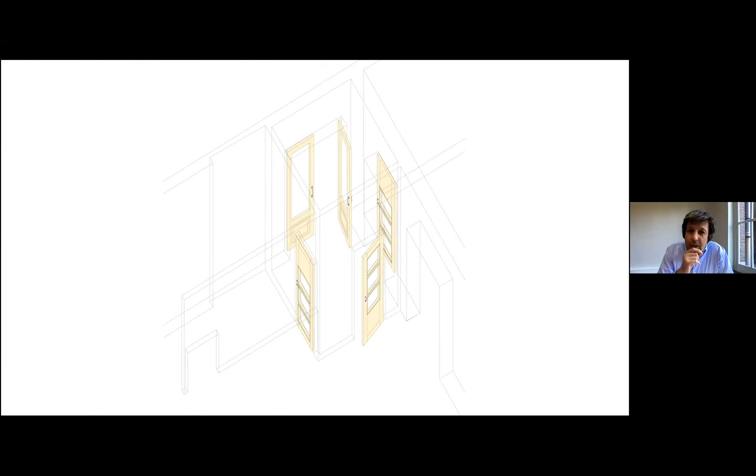Chapter 1, some thoughts. Sometimes it's also about the question of no design. Sometimes as an architect you have to start with not a real intervention, but a kind of slight change of an element. I want to bring this idea on the table, the gallery in Ghent, a kind of in-between hall. You come in through the double door and you have 3 equal doors. Of course, the owner wants that you go into one of the gallery rooms, not immediately into one of the side things.

Just turning the doors, changing the hinges, so that the normal reading of the door, where you have the look on the glass, is really the place you wanted to go through. And the closed part was at that moment on the sides. So you have what is seen as a normal way of walking through a door. And the nice thing was that the lock was exactly in the middle of the door. The carpenter made it very well, so that we only had to change the hinges.

And another intervention, because it was a gallery for objects, also used objects, used in the kitchen. There was the need to still connect the rooms but keep the function as a kitchen. So a piece of the wall was cut out to, on one hand, keep the whole room, and on the other hand, make the links. It's the idea that probably there is no need to really intervene. There is probably only the need of a change in perception.

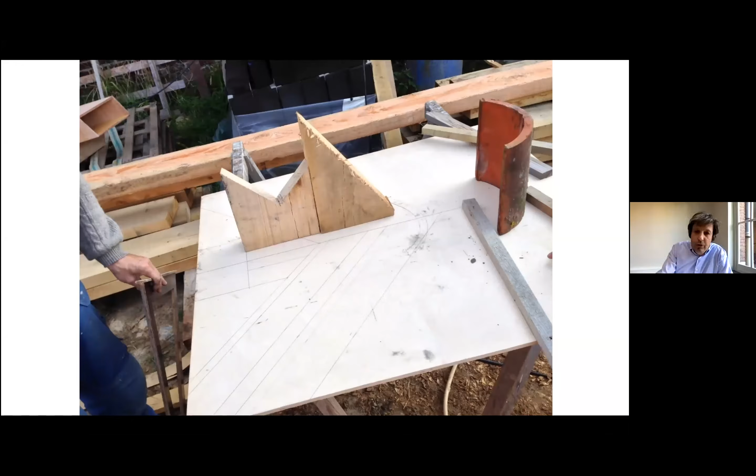The question of construction. In a project in Pepingen, the one-to-one action on the construction site shaped the way we worked on this project. And this is the result of taking this beam away, because the beam was too low to have the space functioning. So what we did is in fact make a kind of prosthesis in steel to reinforce it after the cutting, and even come to the pleasure of how you construct things, how you bring the metal into the wood, and how you connect things.

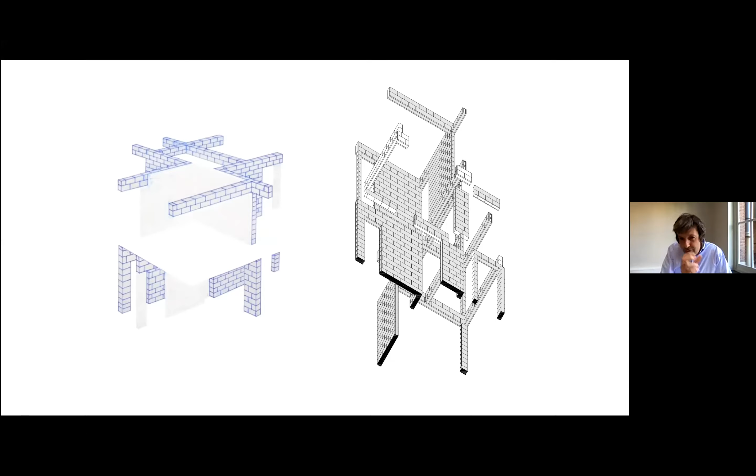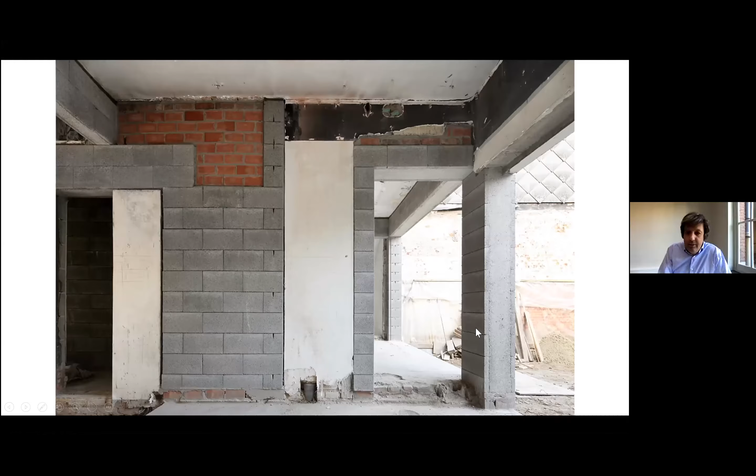The question of construction too: in the project Rampelken, we started with a building where after dismantling you felt that the construction was not stable enough. You could imagine it could go wrong at every moment. And of course as architects we wanted to make changes in this project. So we did one intervention, with a concrete block that you can fill with concrete but also stack, to do everything with it: closing walls, reinforcing walls when needed, even making a beam when necessary. To see it as one tool to intervene in all those things we wanted to reach.

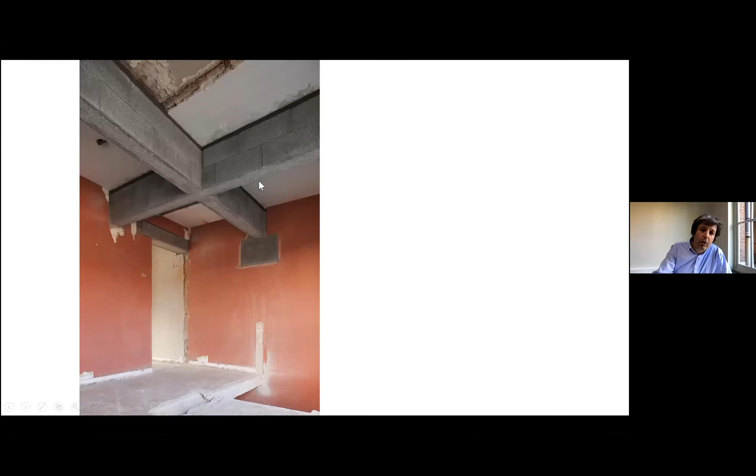Even this kind of cross where there was a wall above it, to have this as a kind of result. And the only thing we didn't plaster afterwards was the reinforcement we did. The question of material one.

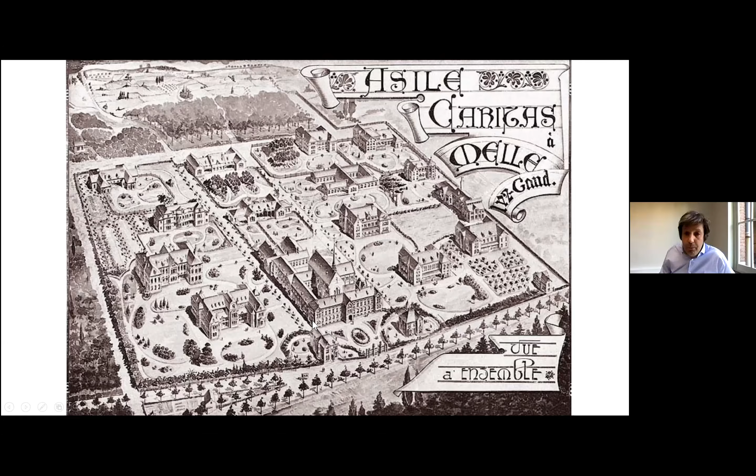After years, during that period, the treatments of psychiatric people changed, so a few buildings started to get abandoned. At a certain moment, they wanted to start demolishing this one. They took out the asbestos, and the asbestos saved the whole building.

Because the new director asked himself if they had to go on demolishing all the existing buildings, since they wanted to make a square. Gideon Boie, who was consulting the owner, brought the idea to the director to say: look, maybe instead of continuing to demolish the building, we have to raise the question of what to do with this building to different architects. So there was a mini competition.

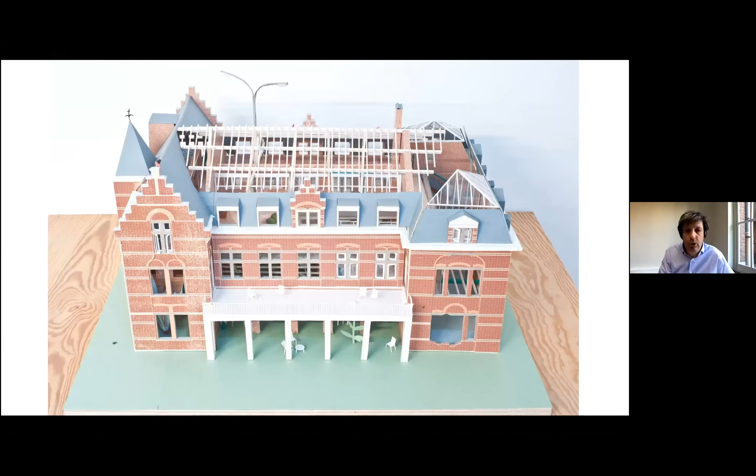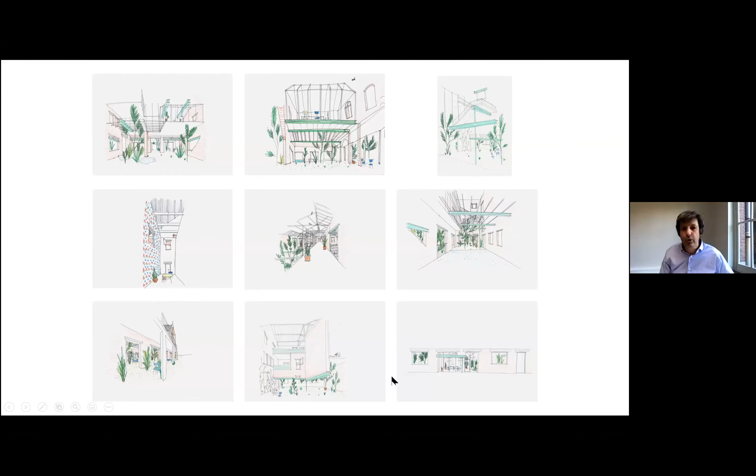We made this big model to explain possibilities in the existing building. We made those drawings to explain the different kinds of places you could find in the whole setting. To end finally with this as an end product, we made the intervention to put a few greenhouses in it. Of course, this building has a lot of limits, but also generates a lot of possibilities in use, different kinds of uses.

So the greenhouses could be used in between climate conditions. You could use this kind of theater place to do something, or some people can put a few wooden blocks to warm themselves in the evening. So it's a flexible building, in the sense it's an open public space where you can find possibilities in different ways.

Of course, we did restorations at the moment we had to restore the wall like that. And because they started to demolish it, to get a kind of machine into it, they dismantled this piece. So we restored it with new bricks.

It brought us to the Biennale in Venice, where we got the Silver Lion with this construction, this exhibition. And the idea was, of course, this existing building was not meant to stay open, so the wood was not always treated very well. So we made an exhibition with planks of thermal treated wood that can be used to replace some planks in the existing building, because the water made some damage to the wood.

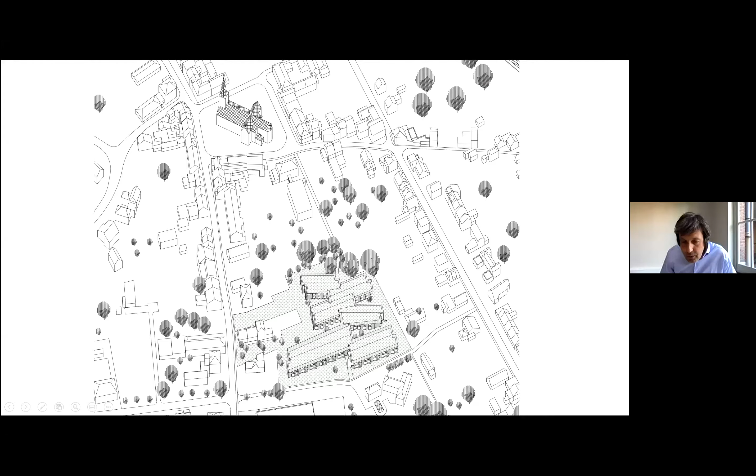It's also about living, the quality of living. We made this project Kapelleveld, elderly housing. It's in a small village. You see, it's in a hidden zone, closely related to the church, and there is a path coming through and going through the whole building to connect all the elderly housing. And on Sunday, the people who can still walk very well can go to the church.

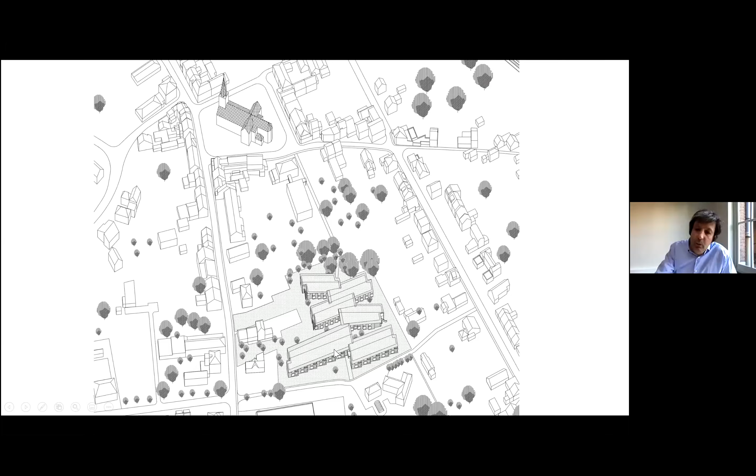To bring it in relation to its context, we started with a small scale. I won't speak about the pleasure of construction, how you can solve the dripping of water, or how you can protect a beam from absorbing moisture. But I will speak about the quality of the scale, the scale relation of the building to its context.

We brought it to a very small scale, and the corners are the result of starting from the really small scale of the room itself. That was the starting point, to come to a totality, not from a totality to the small scale. So starting from the small scale.

I just want to explain one thing, one pleasure in this project. One side of the location was a half meter higher than the other side, and look what it does with the building. The client wanted for two years to make it flat, but we spoke about it so many times, and he agreed and said, yes, okay, we deal with the half meter and we see it as a benefit.

And that made even this side more in scale with the small scale context around it. That means the outside space has a different relation with the ground around it. But as I said, it started with a simple shift in the very strict, almost millimeter-fixed square meter program.

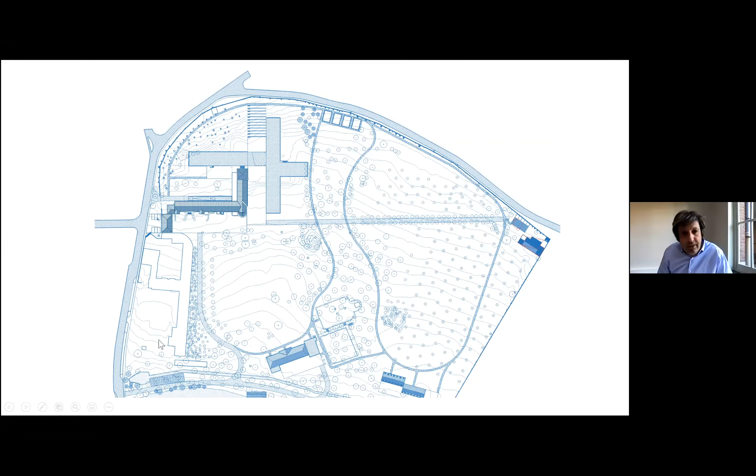One additional thing to explain - there's a really nice back wall on that side, so it's nice to have a kind of relation with that. You look here, in between the trees, you can see the wall over there. So they found a nice place in this corner.

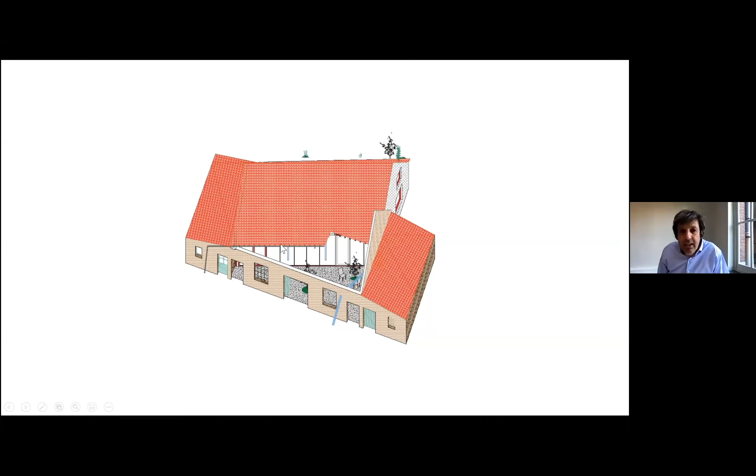They found a nice setting, a little bit hidden, and by the intervention of just flipping the roof construction, we made a kind of public, but not public anymore, because the public is over here, a private zone where you can still open the door to have an openness and relation, to catch the light and make a private zone. This is what the roof did.

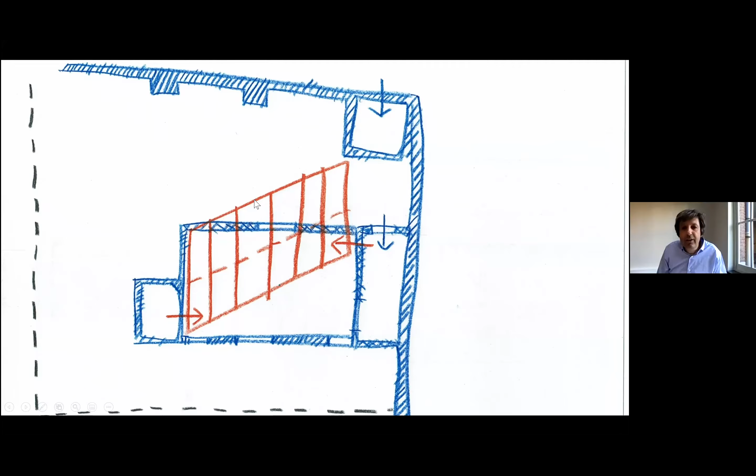The walls stay all in their place. There starts to be an outside space here. And look what's happening here: south is over there, the evening sun is coming over here. And you even can jump out of your walls in this zone because you are, let's say, fenced or hidden, still founding a kind of enclosure by the existing walls over there, using this space as an evening space, a space to sit outside your building, to be connected and related with the existing wall.

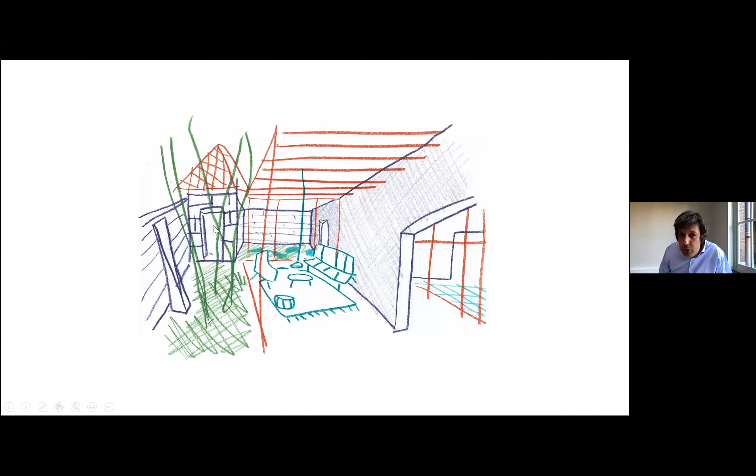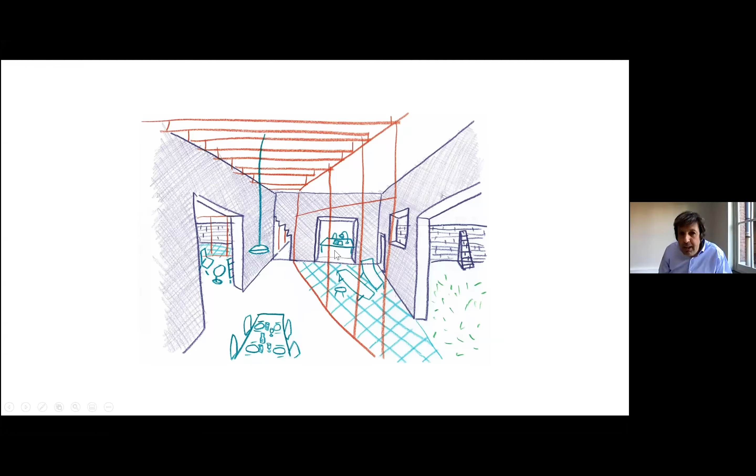There is a really small pavilion on the corner of the old walls which makes it possible that people can come from over there, entering the building as a beside connection along the walk through the whole park. And that's the other side, the sitting space there. But this is then the active zone with cooking, eating, related with the outside space, and a small cabinet, a kind of office space, also related with the outside space. And here you have the overview to the public park.

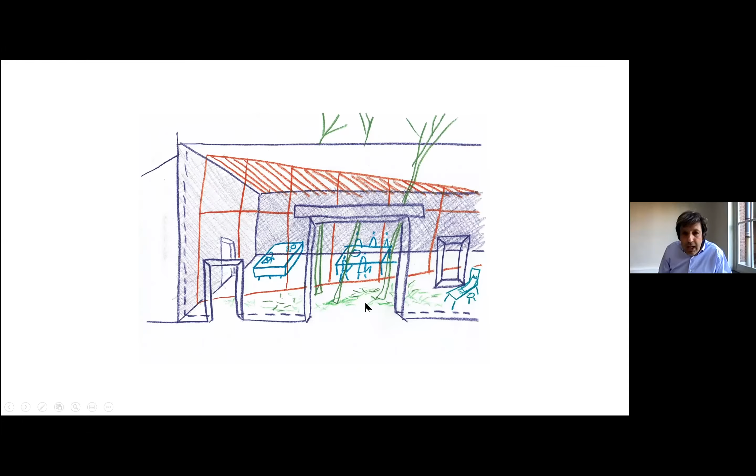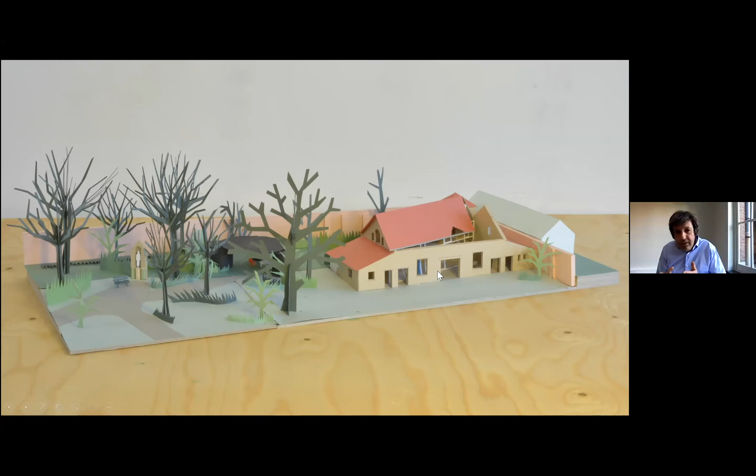From outside, you can negotiate how much you open the relation. A model of it. Here is the turning point of the walk, the Maria sculpture in the corner to emphasize the turning point. But it's all about this kind of simple shift of the roof which makes a complete other building.

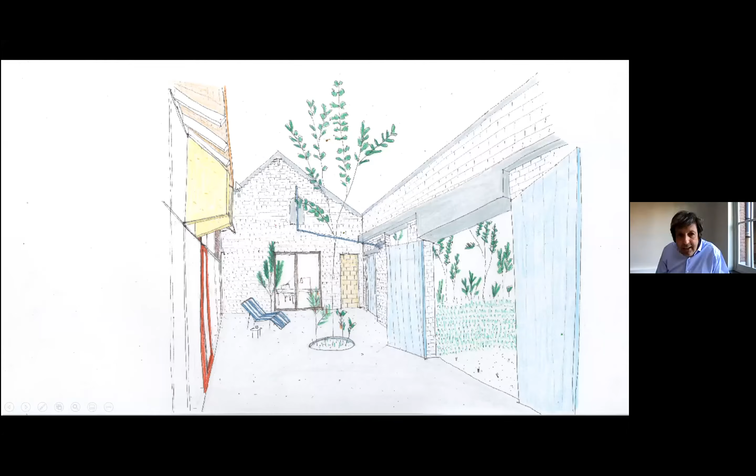The in-between space in the later phase with more worked out details, how we made reinforcements in concrete, how we stiffen the angle by a metal connection, and how the roof cantilevers to give also a kind of protection for the sun, for the upper levels for sleeping.

The sitting place related with the wall, the stair to go up, the office space related with the outside, and how people or the kids can sleep on top of it, overlooking the wall.

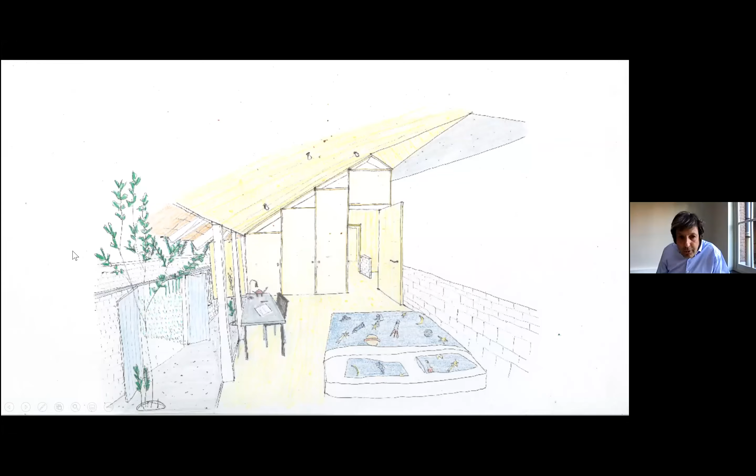And these are pictures from the moment, pictures where we are currently working on it and reinforcing the walls by doing specific interventions where needed.

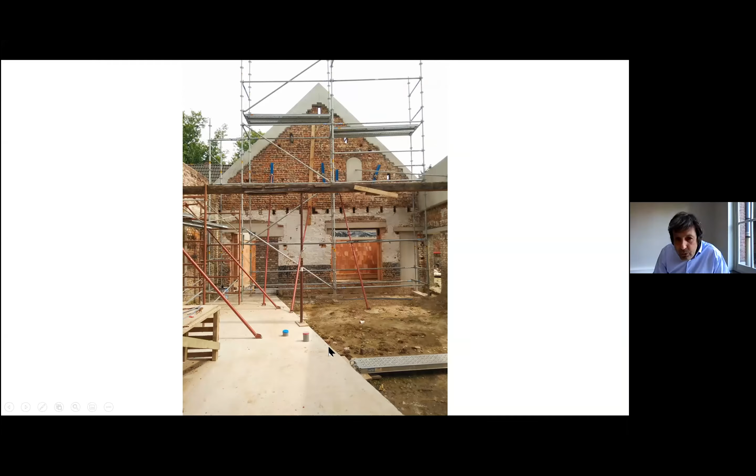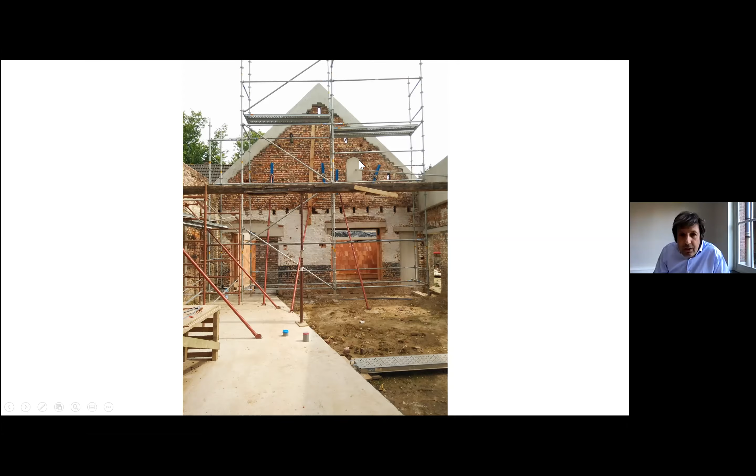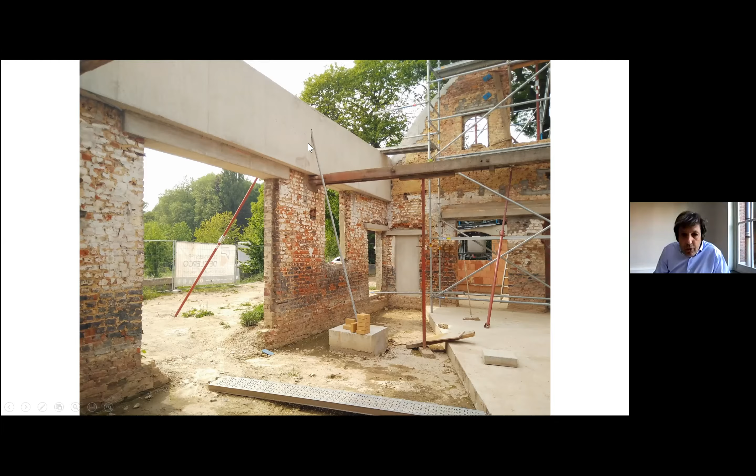Creating the in-between zone, and here you feel immediately the open space, the office was related with that, and the way we reinforce that, the connection to reinforce the corner. Looking to the other side, the relation to the openness, the kitchen will come here later, how we reinforced this view from the office space to the outside, and from the outside related with the park.

We have this one where you here just see a kind of lintel above the old wall. And we do small intervention test study drawings to use a new brick to make very specific interventions.

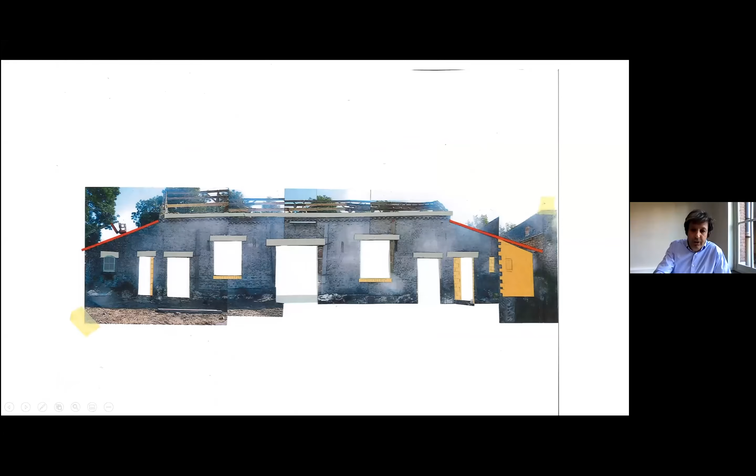Understanding sustainability in another sense. People bought this building, were in love with the way it looked like. Later on, a pitched roof was made on the building. We saw fantastic old pictures of the moment it was built without a pitched roof.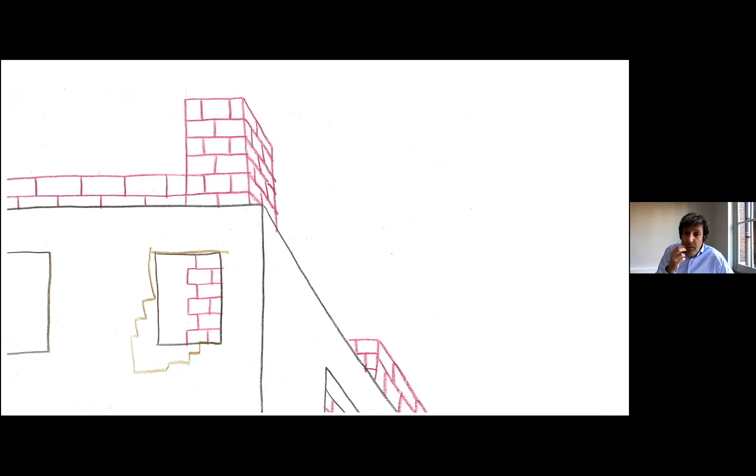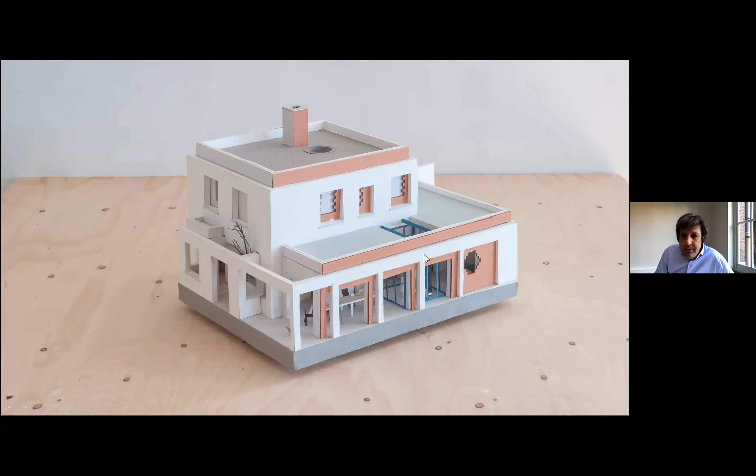This was the intervention: instead of adding a layer on the outside, we built a new building into it, a new layer inside. And this is how it looks at the moment, after doing the intervention of the new building in it, to create new spaces inside and to change the interventions, what we wanted to do with the new facade, but the facade from the inner space.

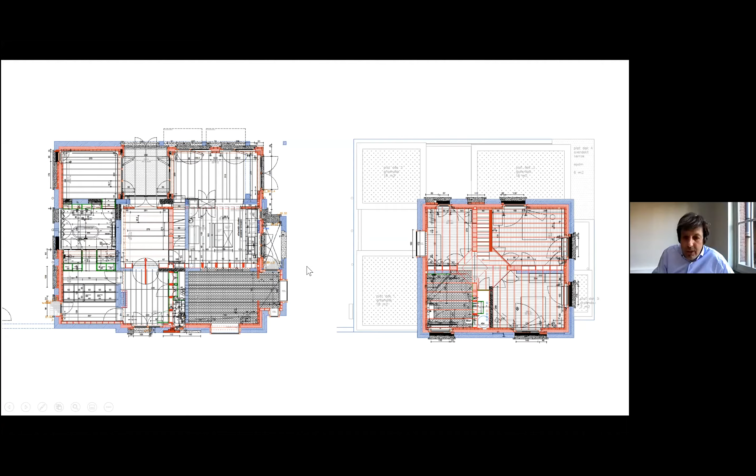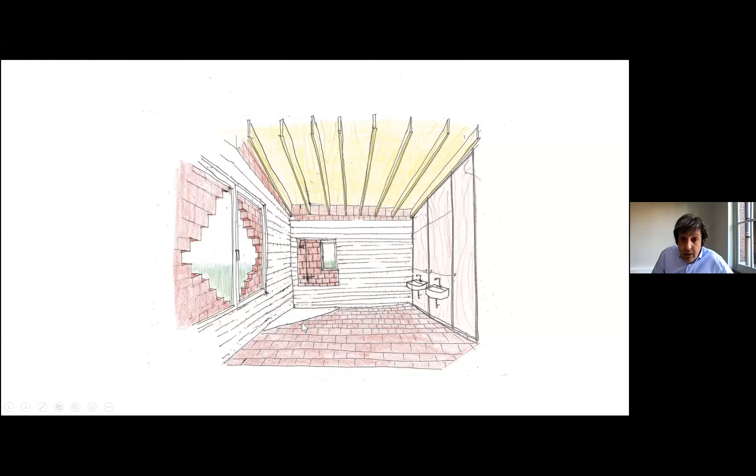A sitting space in the front, you have the entrance zone. In the back, you have a small greenhouse. First floor again, how the bathroom makes the relation with the existing.

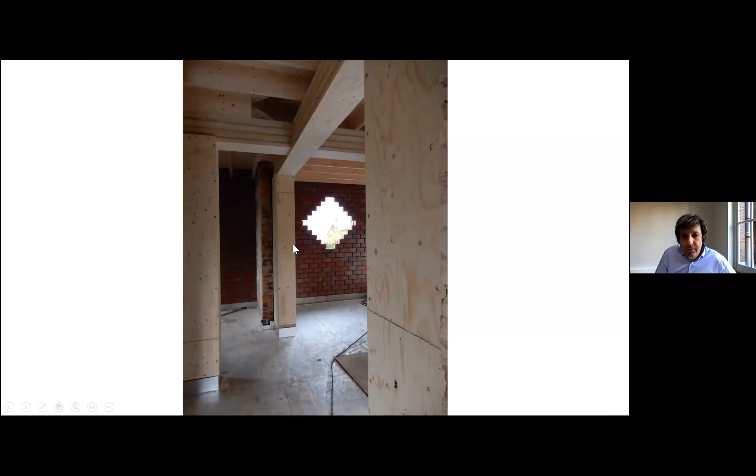We started to dismantle a lot to keep elements we found interesting and to come with this new layer inside. This new layer where you do a relation with your wooden structure, where you benefit of the scale of the bricks, and we used two different kinds of bricks, two different measures of bricks, and how you bring things in relation with each other, and how the upper floor makes its division with the wood coming down, and how the light comes into the middle zone where you come up with the stairs.

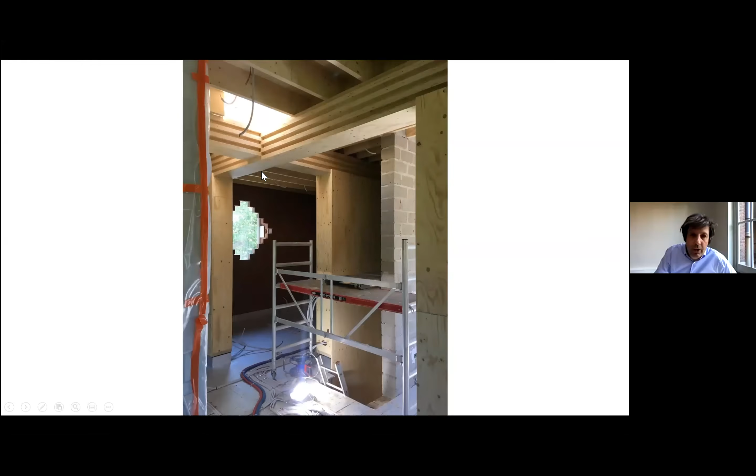How the construction panel is also a beam construction element, and it's also an element to make the whole construction for the upper floor. This is the intervention in a side building to give a direction to a kind of wellness part in the building.

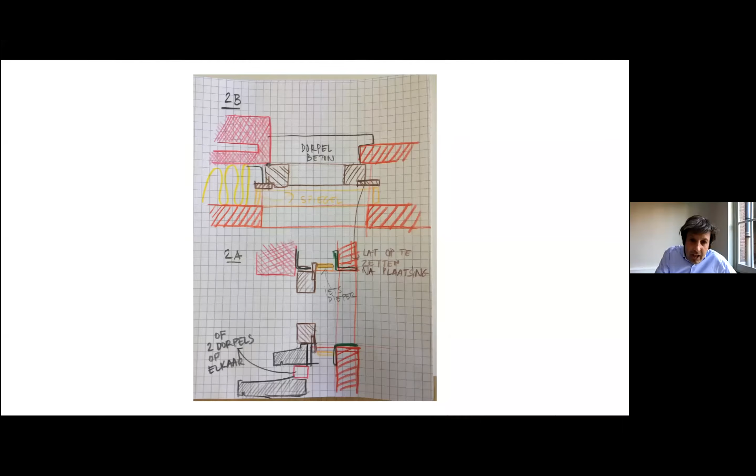Sketching the windows, and currently placing the windows in relation with the existing. And at the moment currently working on how the kitchen will look like.

The last project, understanding sustainability too. Sustainability does not mean insulation. Sustainability means dealing interestingly with what you get and not spoiling materials, and benefiting of the possibilities as much as possible.

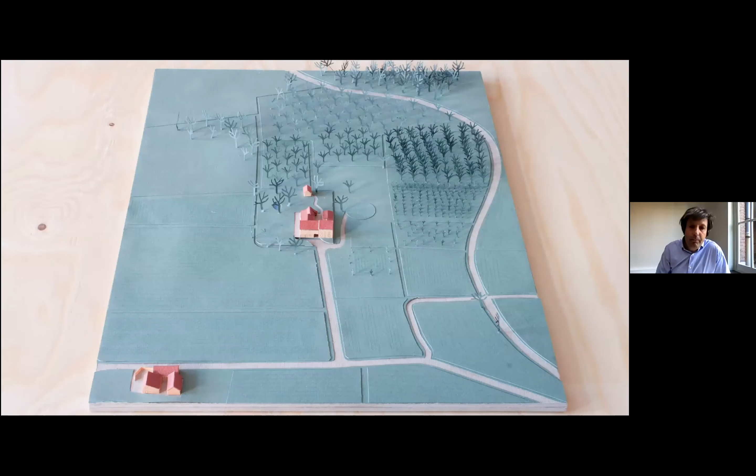Paddenberg is this small farmstead related to a small village where they have a nature educative center. Children come during the day together to get lessons about the fruit trees around it, to get lessons about the vegetation around it with groups. They come over there, eat their sandwich at noon, and then make a walk around it again.

And this is the existing building like it is now. Some interventions needed to be done, and in fact, look, on a sunny day, or even not a sunny day, but even on a not cold day, people are sitting in the in-between space. And this was in fact the trigger to make more space than we could afford, because not all of the space has to be heated. A shelter is probably sometimes, for some functions, more than enough.

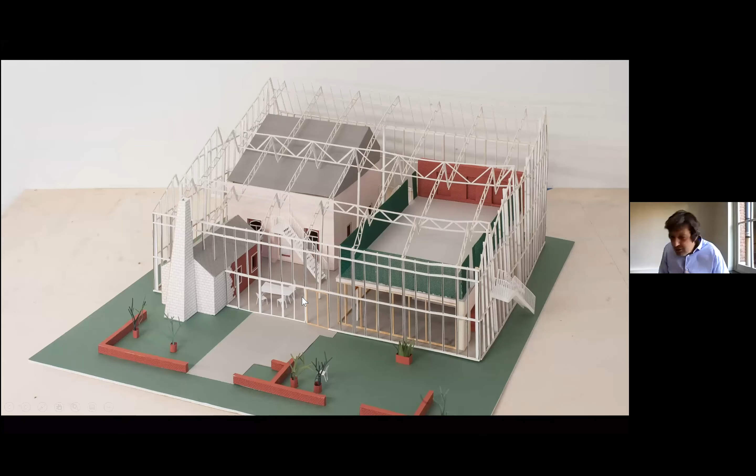For example, the children who eat their sandwich, and these kinds of elements are for free, we get it really for free, if we look to it, if we benefit of it. The model, how we did a restoration of the old oven which was there, and the in-between space.

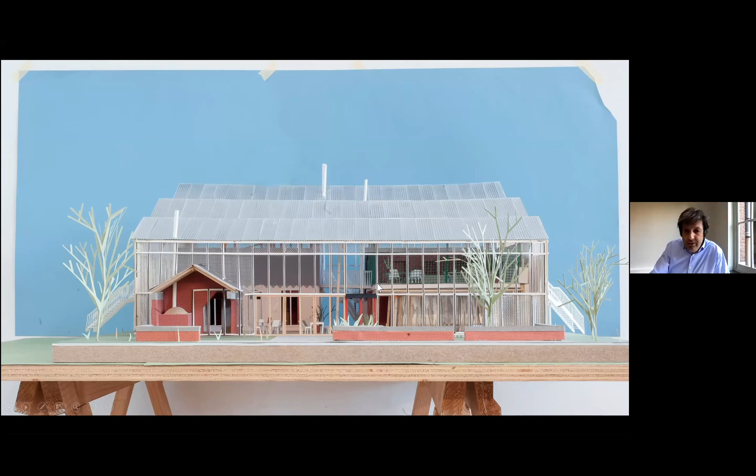Sorry, I did unexpectedly a kind of drawing on it. I'm so used to doing it nowadays.

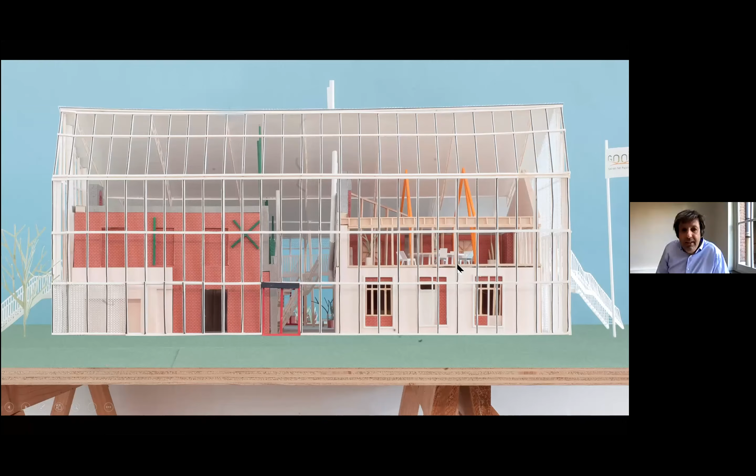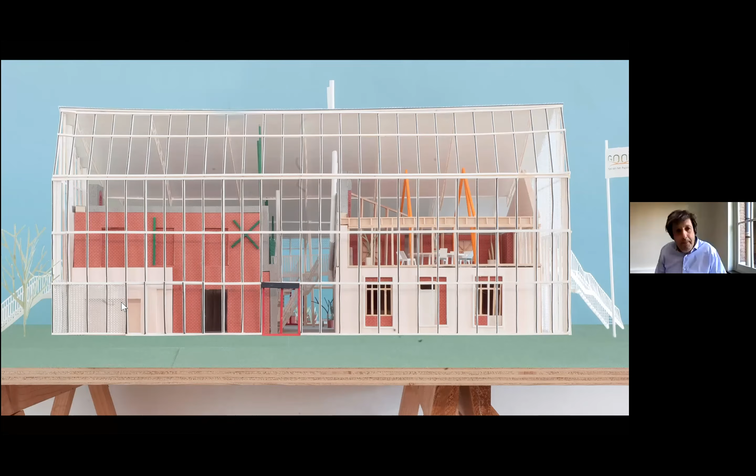This is the front facade. This will be insulated, the building itself. On the top we have a meeting room. Here on the top we have an extra floor, non-heated, but a fantastic space to do something with. And the existing, during the past they started to build sanitary functions. They never finished, but now we continue in the same space, and some pieces have to be insulated for that.

Oh, sorry. Yeah, I had this one. I have to move on this one.

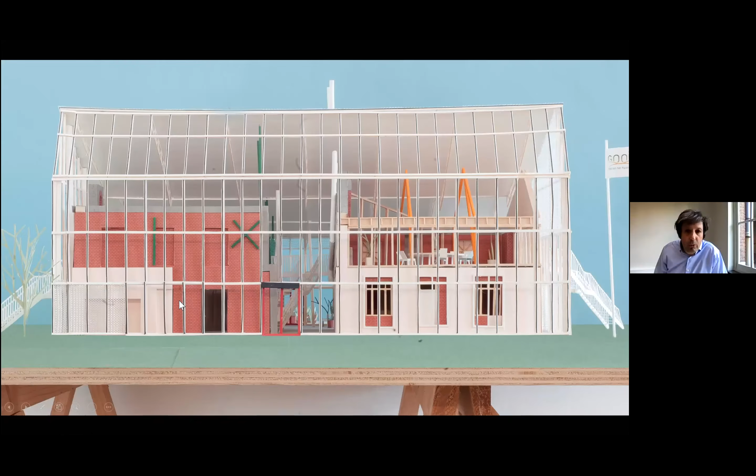Sorry, I have a little, okay, it's working again.

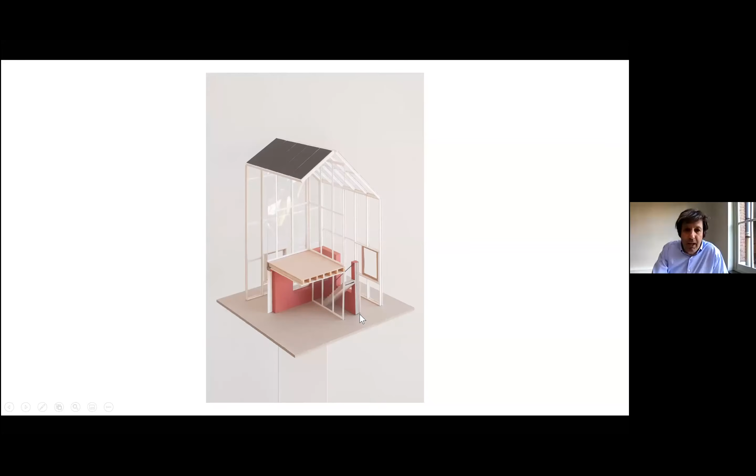We made specific models. Here a model to explain the quality of the upper level of the meeting space. And here you see how the buildings come together. The existing one, so the insulated one, and the cover with only single glass. South orientated with the closed panels to generate electricity, north orientated, completely openable.

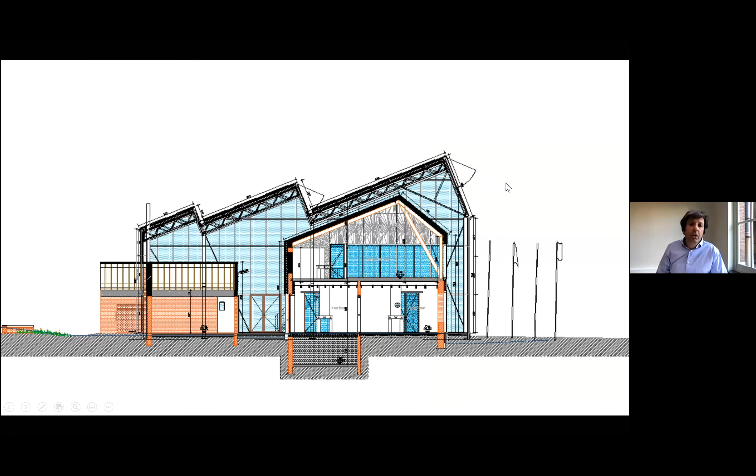Because I forgot to explain, this was a competition launched by the city, and I did a proposal, and I said on one condition: I really wanted to work with a technician who can really do calculations in a very interesting way, so that I really know what the final outcome is of the technologies we use. So one of the things is that we use single glass, because otherwise the overheating will take over. And so many specific interventions.

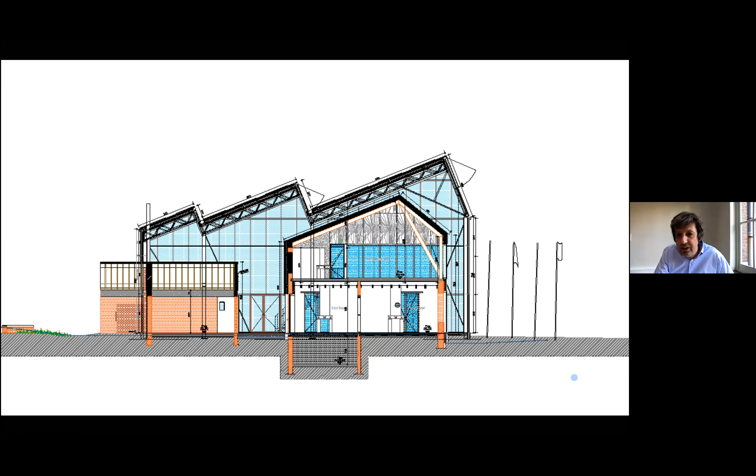The city followed the idea. The engineer, Daedalus, did the whole calculation together with us, or not together with us, but double checked our ideas and changed things to make it really work perfectly.

And look what's happening. You found a lot of in-between space, people coming in here, and this is all leftover space, but functional space related with a small cafeteria. Here you can walk up to have, on one hand, here above a few offices, you can have a meeting room, and here you have a flexible space to do exhibitions or whatever you want.

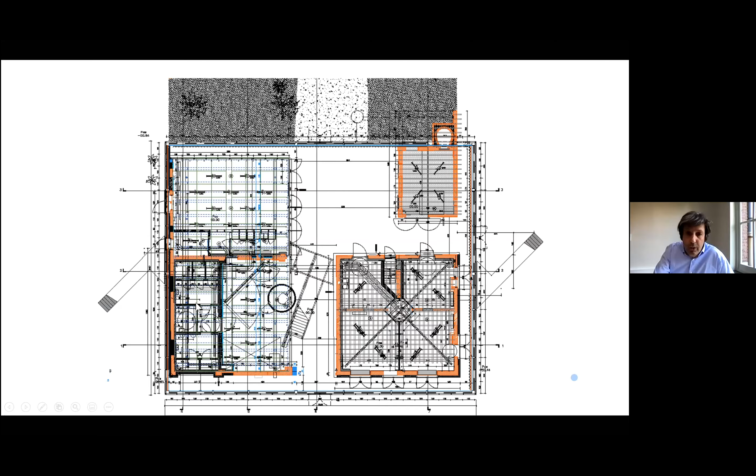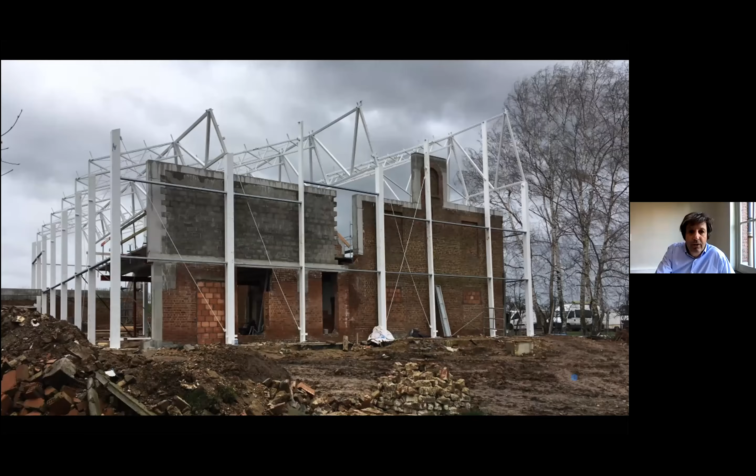Starting to communicate on a very nice 1st May with the model and to explain it to the neighborhood. Starting to take away where we had to take away things, start rebuilding and started to build up the covering, making a new roof in the roof, because parts had to be insulated, other parts not.

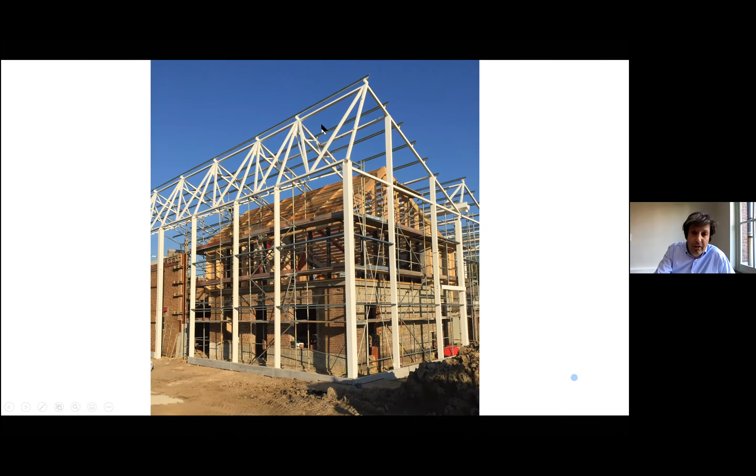And this is how it looks nowadays, the layer of the insulated building over there, the in-between space, and the cover all over it. And this is what I wanted to speak about, the in-between space, the covering, how we have here only windows, but because it's an oven, it does not need to be a heated space, because it heats itself with the action. And this is the extra space on top of the building for exhibitions or so many other functions.

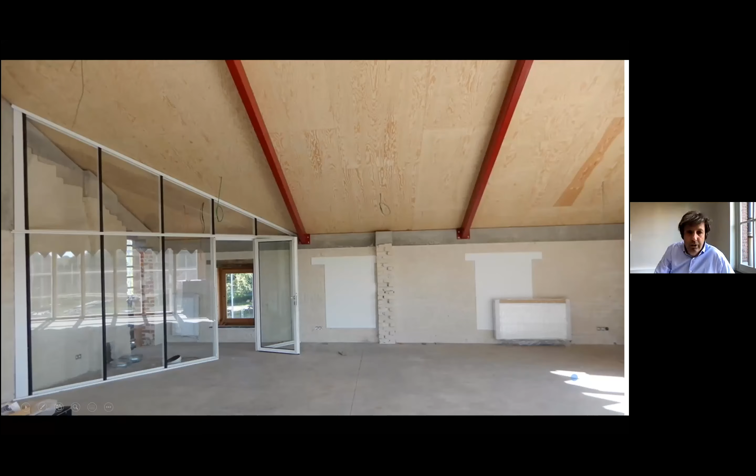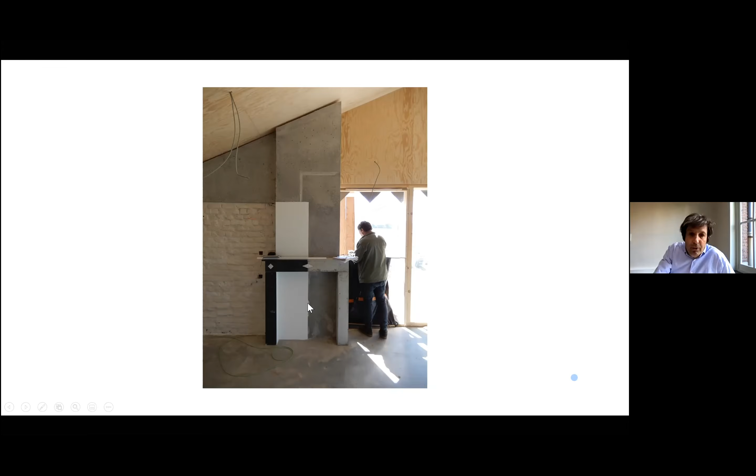Or the meeting room, which is over here, looking back to the internal space, and on the other side looking over, having a view all over the neighborhood, all over the landscape around it. Coming to a reinforcement of the corner, and on the other hand, keeping elements which are still there, dealing with the existing, and finally ending with a relation between the existing and the new.